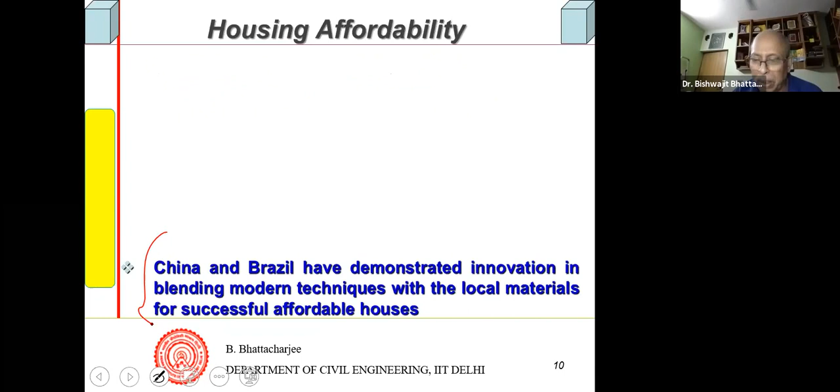So traditional materials and community involvement in community housing have been attempted. China and Brazil have demonstrated some innovation, blending modern techniques with local material for successful affordable houses. But that's limited, that's not very great, that cannot happen in a big way.

One successful effort reported is the Aranya Community Housing Project in Indore, since we are looking at the Indian scenario. There are many places where the state has tried to give houses right from 1970. They have never been successful because to the community it was not affordable, they'll sell it or rent it to buy nutrition. So that community we are not looking into, that cannot be the market.

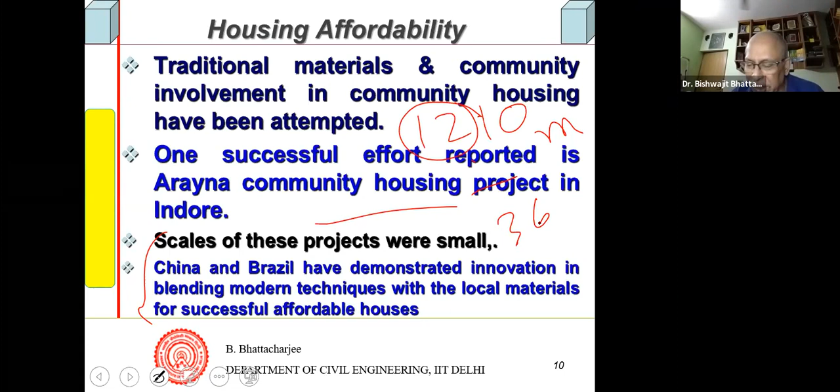Above that is the market, and there's an upper limit of the market too. But all these scales of projects are very small, they're not large scale projects. Remember, we just talked about 1.21 billion population. Think of 1%, that's about 12 million. 3% is 36 million. So percentage-wise, when you look at the absolute population, it is pretty high.

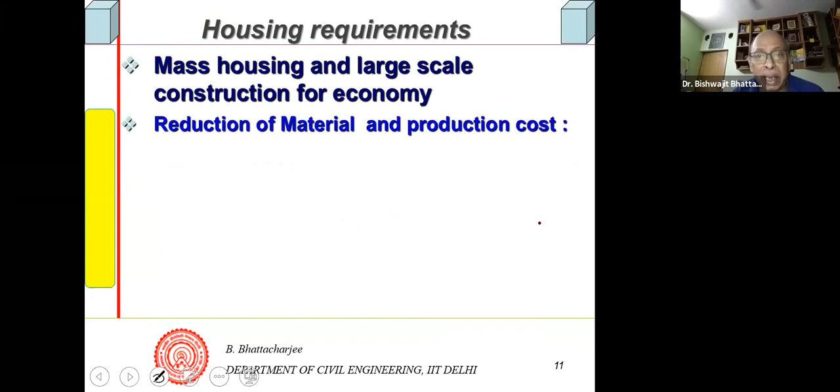So mass housing and large scale construction for economy, reduction in materials and production costs - this is the requirement. Optimal multifunctional design and industrial construction, and speed and construction quality. That's all.

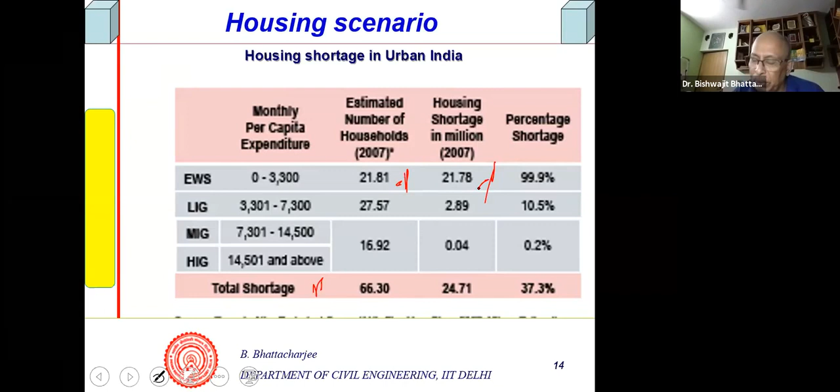Anyway, we thought we would look into this in a more systematic way, and that's why we did this literature review. So monthly per capita income expenditure, based on that EWS has been suggested, and total shortages has been shown in these ranges, for MIG and so on. So what is the shortage? Housing shortage in millions, estimated number of households existing in 2007, shortage also is this. So percentage shortage is 99% and so on.

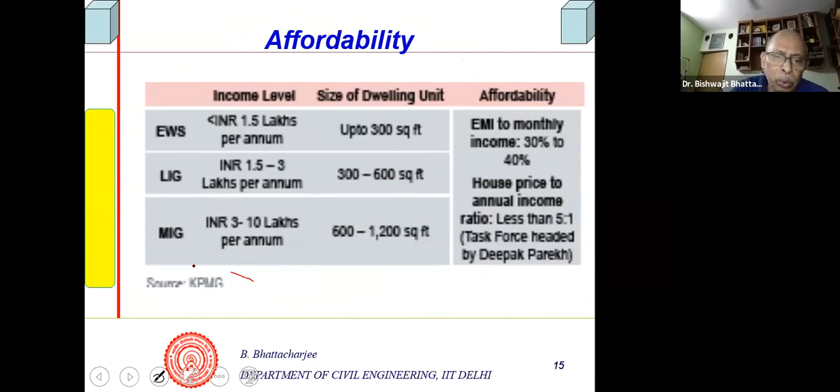Similarly, income level, size of dwelling unit - these are from Government of India, NBO, and some source from which one can get it. But I'm not really interested much in this. The minimum requirement is based on just hygienic condition, livable. You don't have to have great comfort, but you can design for thermal comfort and things like that. Sanitation and hygienic issues, that should be there.

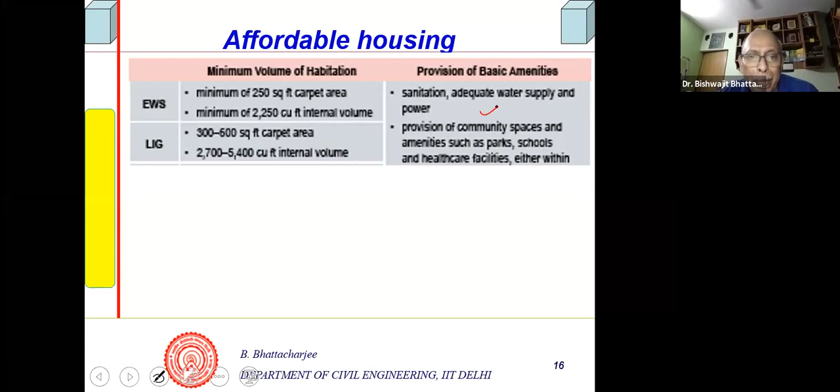And carpet areas for LIG, that, this is what it is. So in this zone, there are a lot of vacancies.

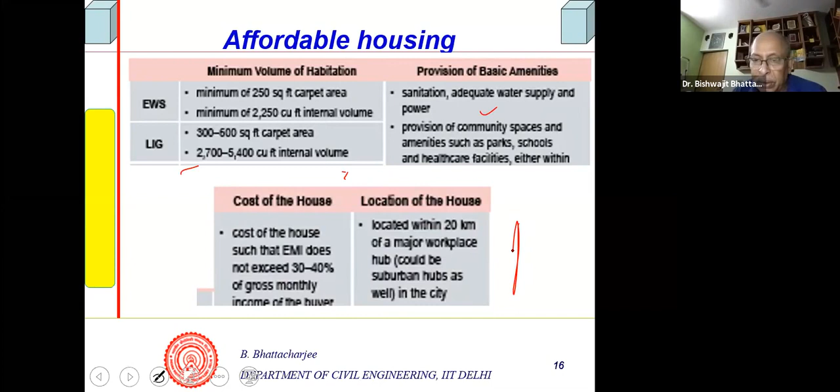Cost of house should be such that EMI does not exceed 30 to 40%, that's what I said earlier also. And it should be located within 20 kilometers of the major work place. So it goes into a little bit of city planning as well. But anyway, I'm not really looking into this, it's from a literature survey we did to look into.

So basically what we thought was that a realistic market survey from all this should account for expenditure capability. So affordable housing lies above this PLB of expenditure, or 2.23 times PLB, the poverty line basket.

The PLB values we could collect from NSSO, National Sample Survey Organization. I think it must be based on the Rangarajan or Tendulkar Committee's report. At that point of time, it was set at 973 for rural and 1,407 per capita per month respectively in urban areas.

So if it is 2.23 times this, that means 2,170 rupees per month per person and 3,138 rupees per month per person are the affordability limits for housing.

So ALH, if that is it, below that, nobody is going to buy a house, or they cannot afford it, simply. So that population you have to leave out. The market cannot do anything for that, unless their affordability or expenditure capability improves.

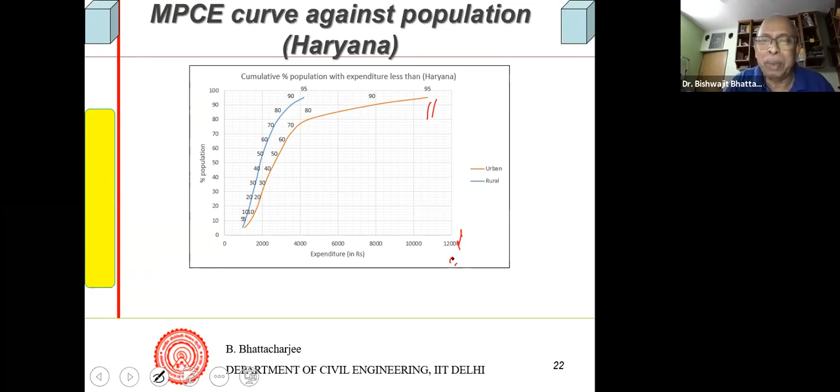They're all there - this is rural, something like this. I also picked this, nothing against any state, just to show you that I have similar graphs for every state. So I'm taking the range, the extremities - that's what we do in a scientific experiment. Bihar had 3,500, and this is how it is. Other states fall in between.

So these curves can be obtained from the census data, and then this is cumulative, 95% below. So if I want to find out the percentage of population at a specific MPC, these are called, all India again, percentage of population.

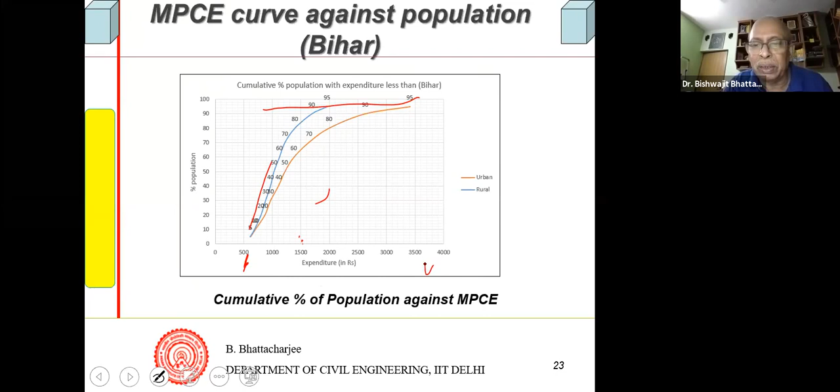And I have to take an algebraic term called log. Some of you might be familiar with this, because the value varies from 500 to 5,000, so the scale is too long. If I take log, then 5,000 becomes something, 1,000 becomes 3, and 10,000... log base 10 of 1,000 is 3, of 100 is 2. So they get scaled down. It's logarithmic, a bit of algebra, but anyway, you have to bear with me.

This is a little algebra involved, but not much - I'm not going to go into that. So at individual log values of MPC, you could get how much is the population percentage. But I'm not going to talk about this anymore. Even that was not enough for me to do the scientific exercise.

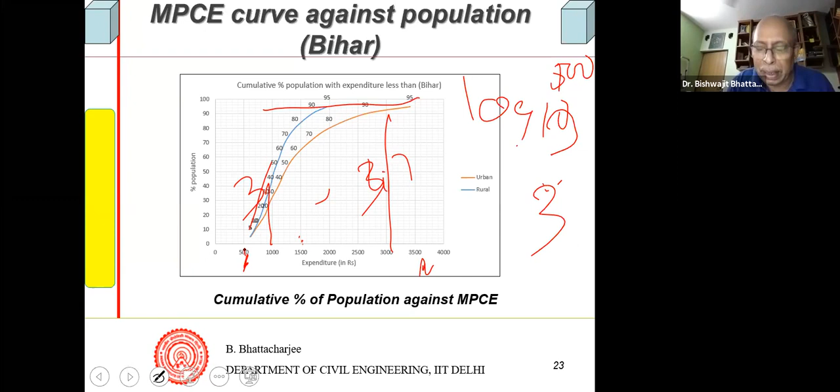This log MPC was too small. If you see this log MPC - log of 3,000 gives 3, log of 1,000 gives, sorry, this gives 3, this is 3.7 or something like that, 100 gives 2, 10,000 gives 4. So they are small numbers, I had to multiply by 10.

And that I call E - 10 multiplied by log of MPC. I devised my own scale, and you must have heard of this - some of you must have heard about noise, dB, decibel, which is also on a logarithmic scale. Many things evolve varying over a large range, and I don't think I'll go into the physics and maths of those. So I had to take it algebraically - many times we do log, right? Take log, and that's what it is.

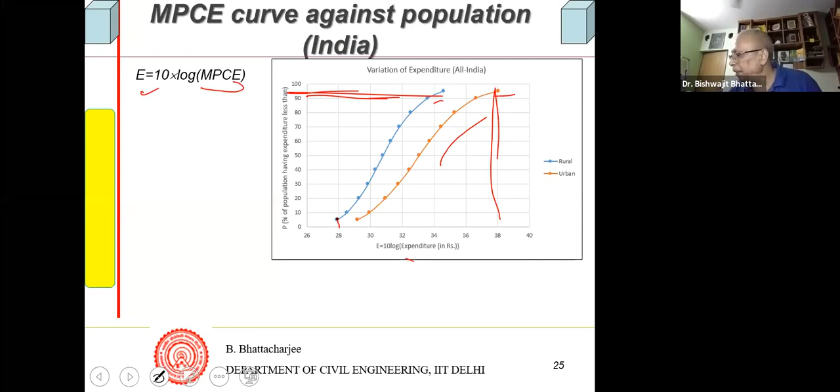So E, I am defining a new variable, which is related to MPC. When I plotted the population cumulative graph with respect to this, I get the urban like this and rural like this. The percentages remain the same, I have not changed this - only the values have become 38 instead of something like 7,000, and this has become 28 instead of something like 500-600. This is how I changed them to this variable, and I can fit a curve to these equations.

Those from arts background may not understand, but you must know from management science, if there's an independent variable, something else—for example, the number of webinars happening this month may be a function of COVID severity, or number of COVID cases. So we relate things. In physics, science, maths, including concrete science, we do this quite often. These relationships are available, and we could fit this into a relationship. I'm not going to tell you how to do it, not interested.

We used a software called CurveExpert that will give you this—Excel will do many things too, though maybe not a complicated curve. So you could fit a curve, P is this, fit curves to this. For each state we found out A, B, and then there's a term C—all this we found out, to the power C. These terms we found out for all the states.

So if somebody wants to do these calculations for any state, when we finally find the market, they might be interested. And then differential rate of change also we have found out. Anyway, considering the time, I'm not going further into this.

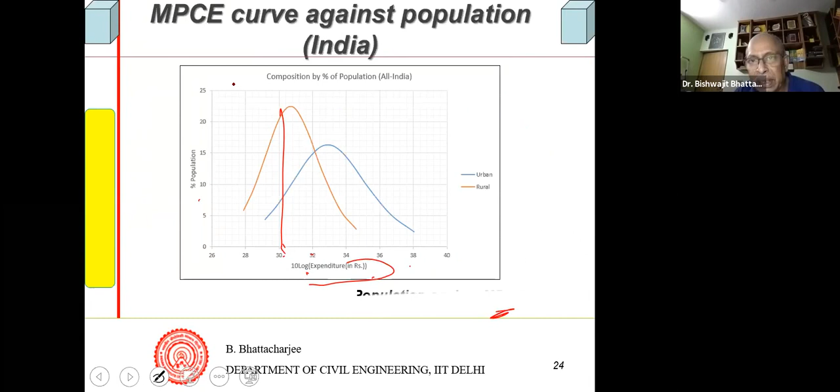Yeah, 2170 and 3138. If I take these values here, and take E, calculate according to this, then E comes out to be 33.4, and for urban it comes to 35.0. So this 33.4 is here, 35, and therefore you see...

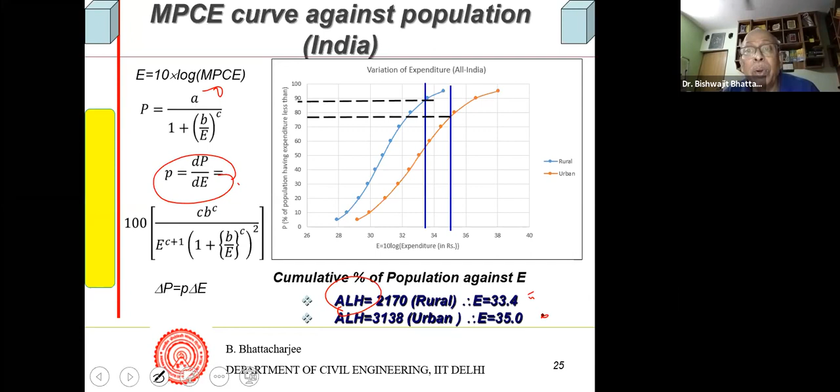89% of the population may not be able to afford a house in rural India. And by 2011 census statistics, 77% of the population of India may not be able to afford a house. But 23% itself is very big. So 33—that's what I'm saying—population works out to be 89 and 77.

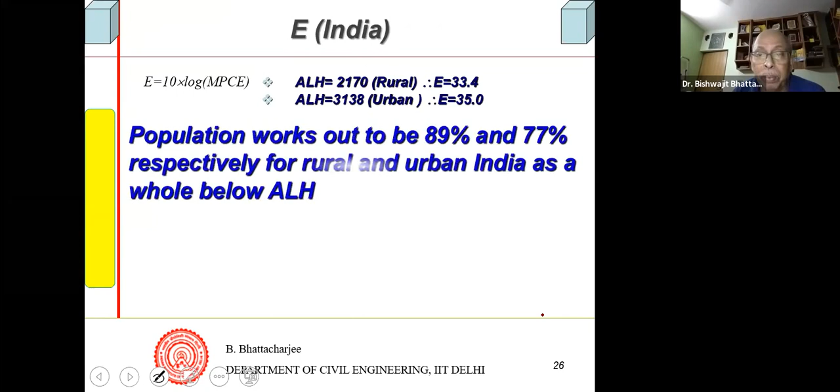And thus maximum available market for housing would be 11% and 23% of rural and urban population of India as a whole. Now 11% means 14 crores, so more than 14. And 23% also would mean double of it, 28 crores. That's pretty high.

There's a surplus supply over higher income population corresponding to monthly income per capita expenditure capability of 8,500 from that graph I showed. And if I take per capita income—this was per person per month—monthly annual family income is 5 lakhs 1,000. They're the people who might already be having a house. So this population is not our market.

So 99.8% of rural population have an income lower than that—most people have income lower than that. That means all my 11% is available as market. And 97.5% of urban population have an income below this. So 100 minus 97.5, I subtract that from 23—20.5% of the urban population is the market, total market in the country. State-wise, you can find out.

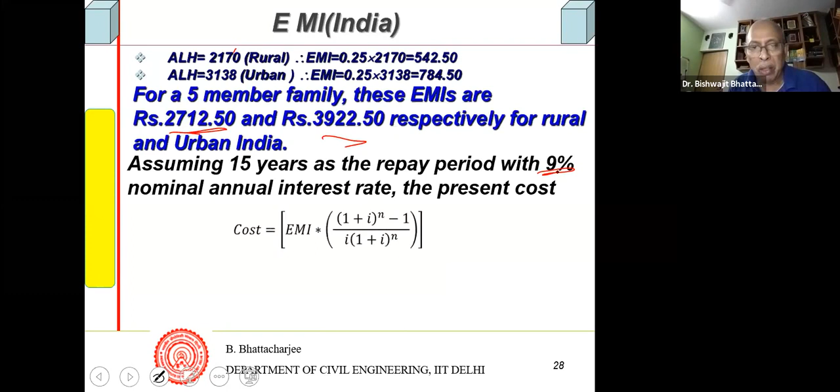Its present cost can be worked out. Land cost I have left out—I'm assuming the land cost, you have to add or adjust, whatever it is, it's a very variable thing. So I didn't take it. Taking 9% as interest rate, the monthly interest rate would come out to be this, and for 180 months, 2.67 lakhs is the house cost with minimum hygiene and minimum things.

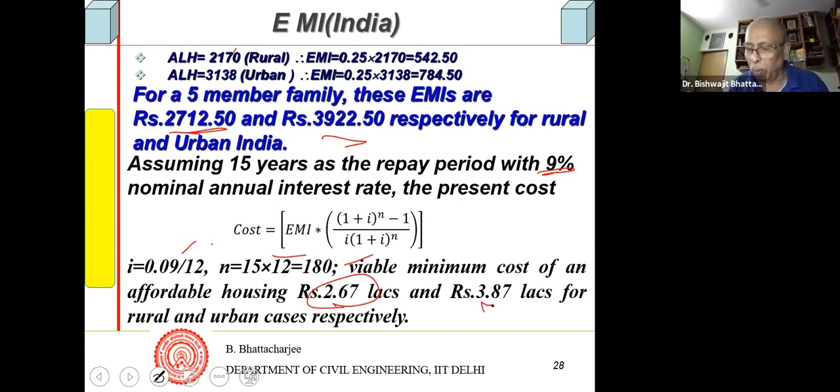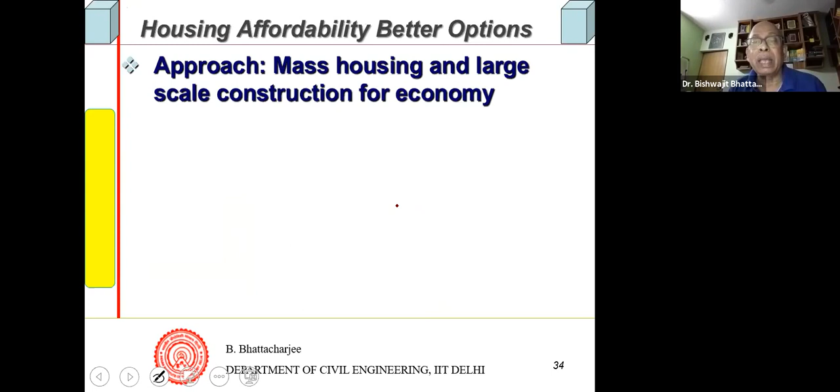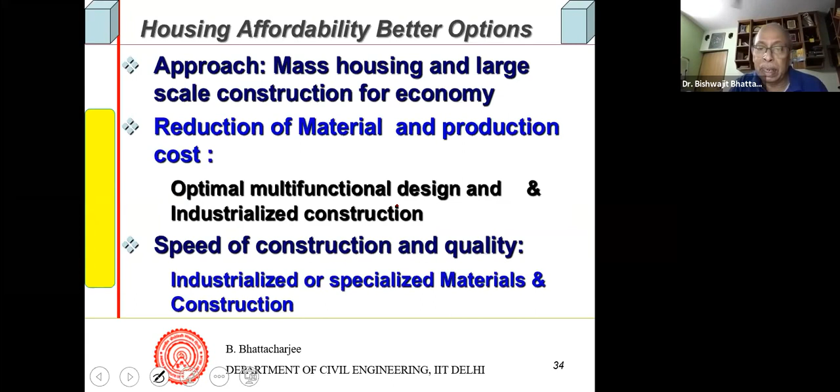But then, it has to be mass housing, large scale construction for economy, material and production cost, optimal multifunctional design and industrialized construction. If you want to give minimum thermal comfort, it has to be multifunctional. The structure itself should be able to do more than one function together, and obviously speed of construction and quality. So only industrialized and specialized material construction can do this job.

And I of course say concrete will be a major component, industrialized construction with concrete, because it's an extremely versatile material. If you look at the material side of it, this is a drawing, a sketch for the material side of it.

You can have a large number of binder options, right? This side, fiber reinforcement, that's for high-end concrete of course. But I'm not saying high-end material you will not be using, you might be using, I don't know what is the kind of ones to look into. So you can have OPC here as a binder, OPC then water, OPC and water that forms the binder. OPC, water, maybe silica fume, maybe geopolymer, maybe what do you call resin binder. There are all possibilities.

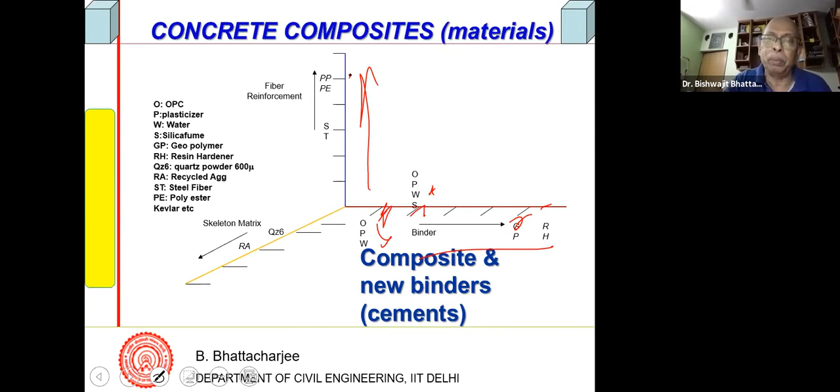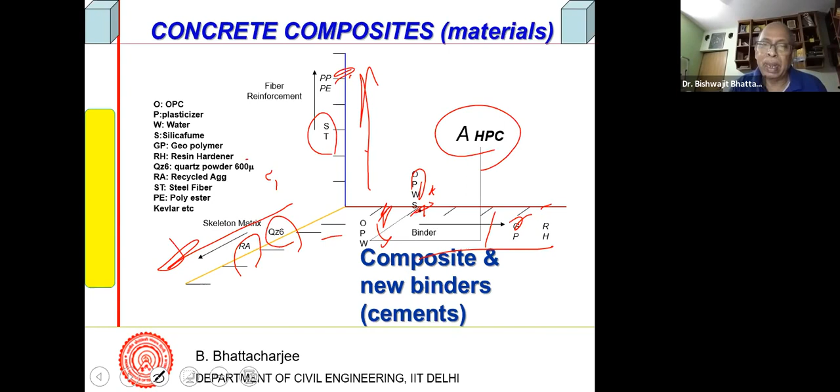It only shows possibilities. There are all kinds of fiber reinforcement possible, from steel fiber to polypropylene, they have their specific purpose. This stops bleeding, this gives you better fracture resistance and so on. There is all kind of skeleton or aggregate system could be there: recycled aggregate, manufactured aggregate, simply quartz that's used in high performance or reactive powder concrete. So you have actually quartz, 600 micron down, right? That's what you use together with OPC with silica fume binder and some sort of super plasticizer, hyper plasticizer, and steel fibers might give you this. So you can see that range.

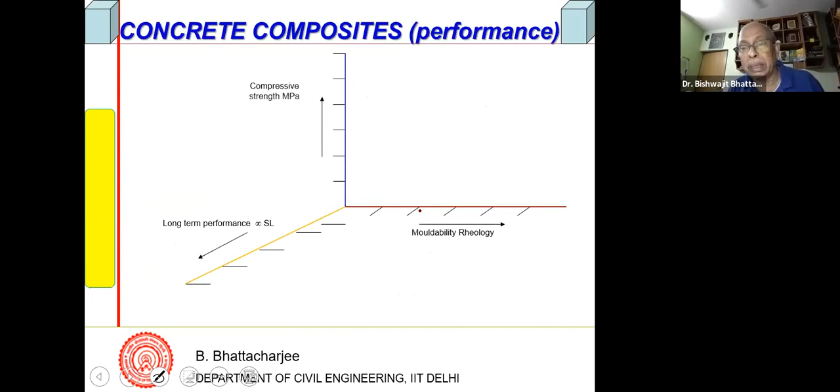You can design composite system, concrete composite system, and you can have its performance again in a 3-dimensional matrix. So x-axis shows its moldability, what you call rheology sometimes in scientific terms, and you have from zero slump to self-compacting concrete, mass concrete to 200 MPa reactive powder concrete. Versatile, very, very versatile, but then it has got problems with ductility, and you can make composite out of it.

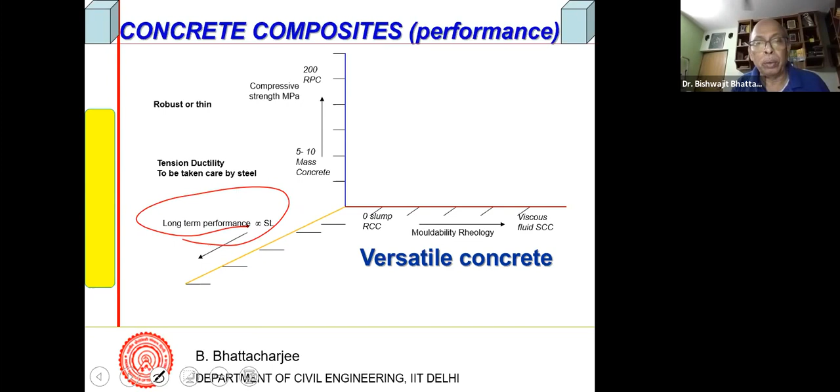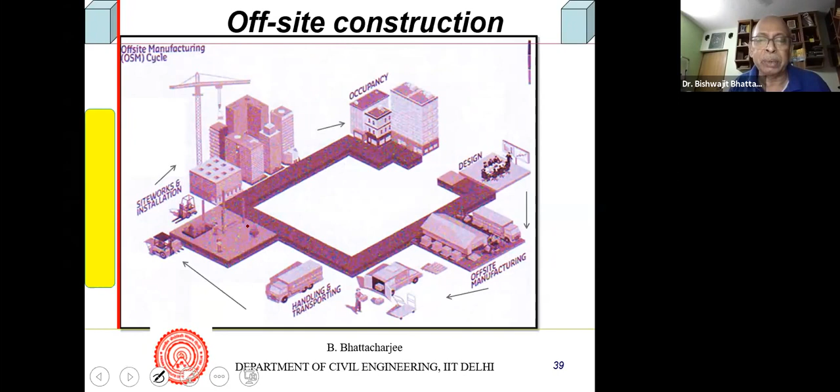This is offsite construction, which we know starts from the design. Everything is done in the manufacturing, done offsite. I'm not going to discuss this too much today. And then site works, installation, transportation, and all that. So that's offsite construction and offsite manufacturing cycles, something like that, construction design, everything drives the other one, right? And people, process, technology, all involved everywhere.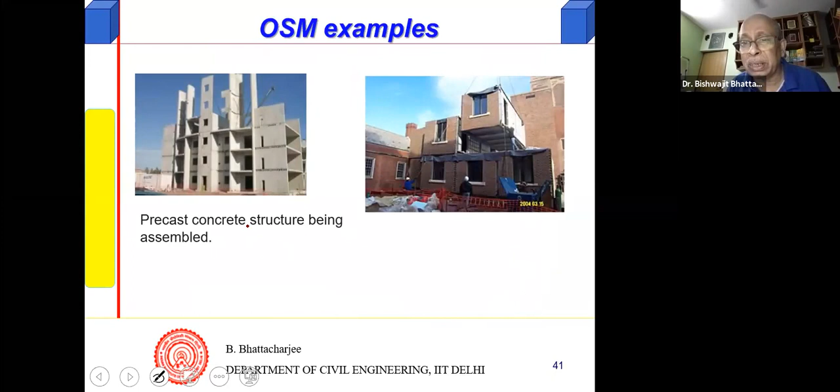Examples, plenty. Precast concrete structure being assembled. Some of this is being done in India. It's not that it's not done. 3D modular, steel modular, increasing construction efficiency through modular construction, as seen through examination of construction performance.

Obviously, capital cost is high. Labor skill, I'll talk about this quickly.

I do not know how much time do I have, given the extent and breadth of the topic. So I'll take about 15, maybe 10 to 15 minutes, not more than that. Is the time there for about 5 or 10 minutes or so? Yes, Mr. Praveen? Okay, I'll go ahead.

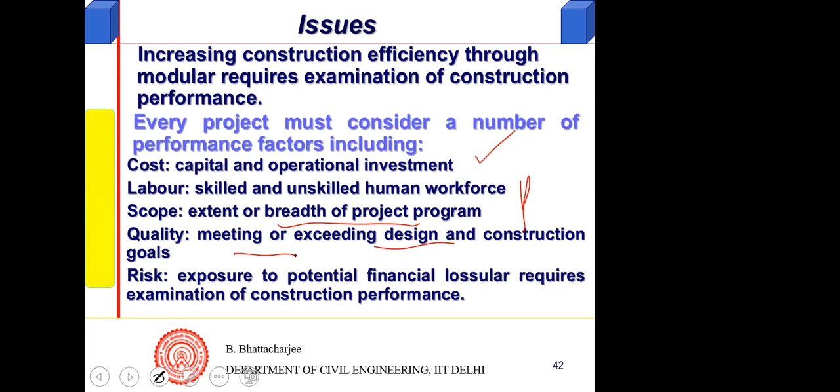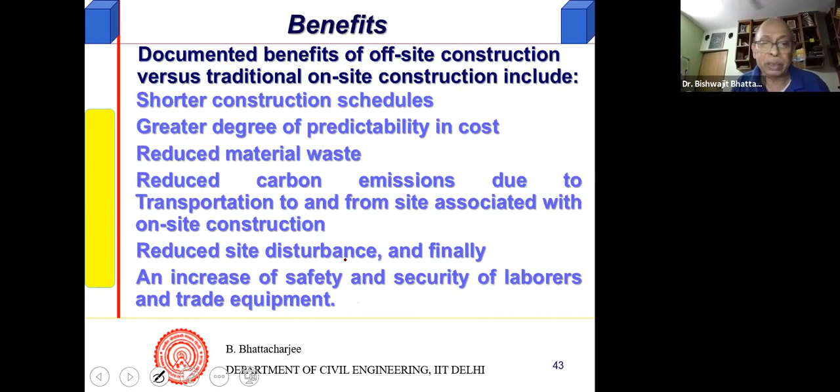So quality and all, you can control pretty well. Cost is reduced because individual cost will be reduced beyond a point, called the break-even point. There are plenty of benefits: shorter construction schedule, greater degree of predictability, and so much more. You will get plenty of literature on this, so I'm not going to talk about it.

So useful parameters are, of course, labor cost, material cost, and plant cost. There's something called the C factor, which is covered in one of my articles in CE&CR, in the precast chapter. So the C factor is the ratio of cost of skilled labor to cost of concrete delivered at site. And another is the P factor.

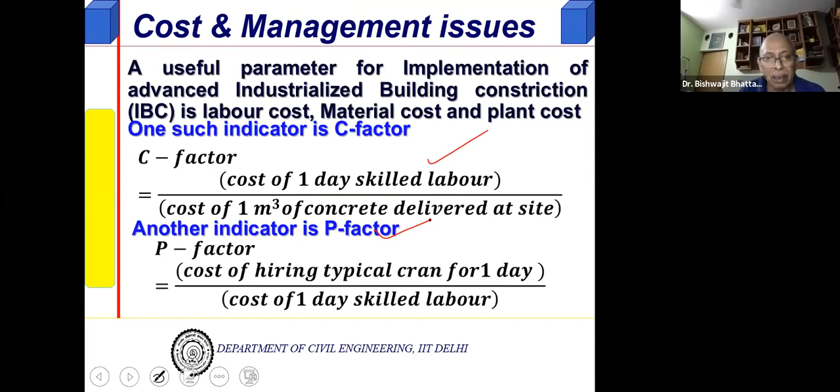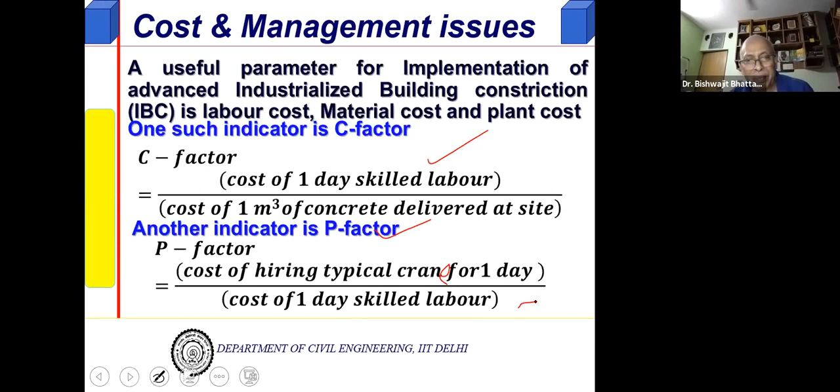P factor involves the cost of a crane. This has somehow become a picture, I'm not able to edit it. So it's the cost of hiring a typical crane for a day, and the cost of one day of skilled labor. The product of these two has been seen to be constant, around 10, for many countries when compared.

I'm talking about buildings, obviously bridges too. You can have site plan, for example. So precast may not be industrialized construction. Industrialized means you are selling it also.

There are three types of precast: one is on-site, temporary, like for a bridge. There's semi-permanent, like the casting yard of Delhi Metro, but that's not for buildings. And permanent, like Hindustan Prefab or many other companies now involved, particularly in Pune, or many other places, even Delhi, there are a number of them. But they have to be a factory to sell it, they have to see the market.

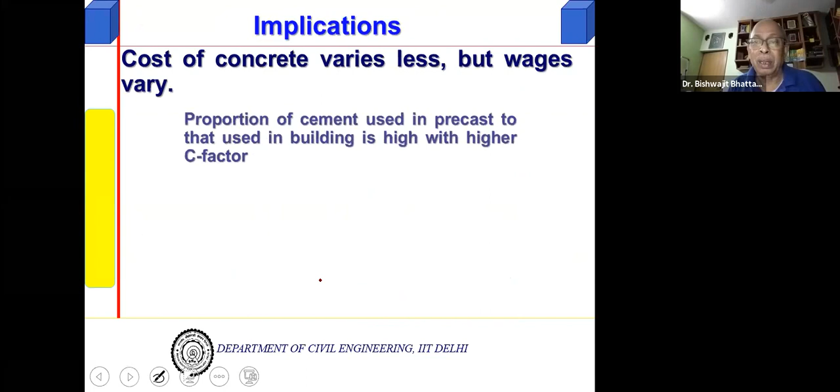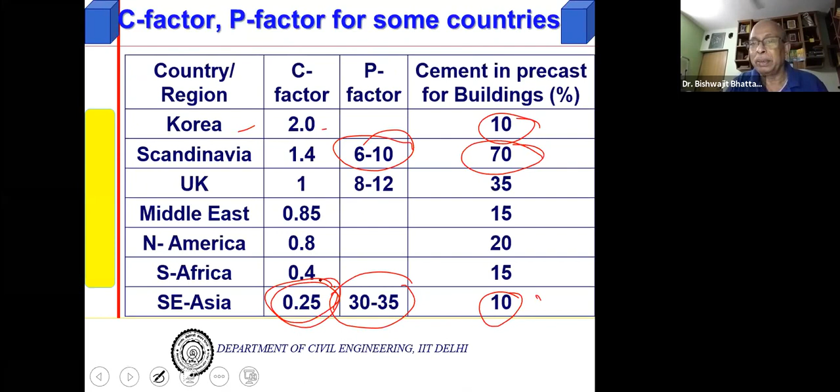Wages vary, but cost of concrete doesn't vary much. And the proportion of cement used in the precast industry is higher with a higher C factor — that's the proportion of cement in precast construction. This has been seen to be around 10.

And if we have to improve this, possibly, indirectly, perhaps somewhere the state or a consortium of people should train people, cut down on the unskilled people, and increase their skill.

So that they earn more, but earn using a machine. Well, these are just thoughts. The Builders Association are the better judges of this kind of thing, they know their economics, they can form a consortium or think about it more. I'm just inducing, triggering off, sparking off a thought in their mind that there's a market somewhere.

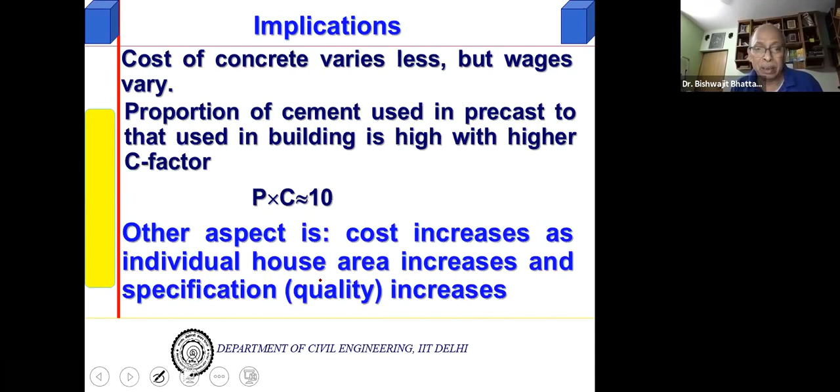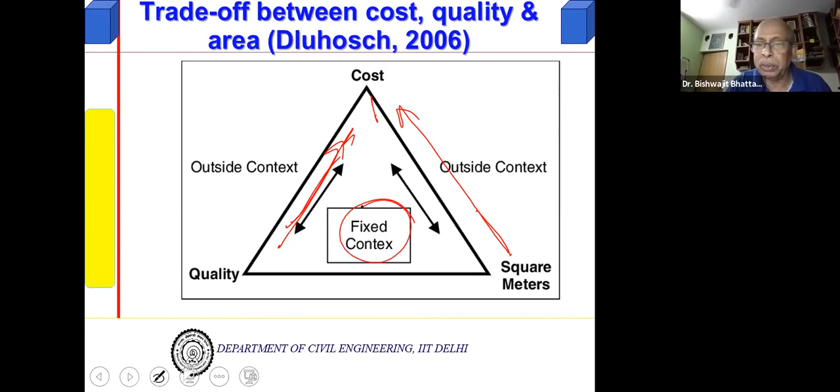Other thing is that cost increases as house area increases and quality increases. Quality may even be a specification someday. So you see the cost increases when square meter area per house increases. But then we are looking at affordable housing only, so it reduces when this reduces. When you improve specifications, quality also improves, but there's a minimum quality you have to maintain, and that also increases the cost. There are some fixed costs, and outside, there may be something more. Anyway, this is from their work.

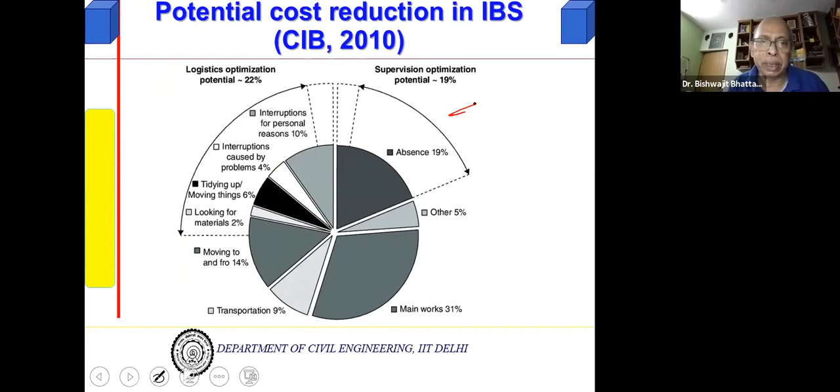Industrialized construction can cut down on supervision cost by 19%, and logistics cost by 22%. So the cost reduction is possible.

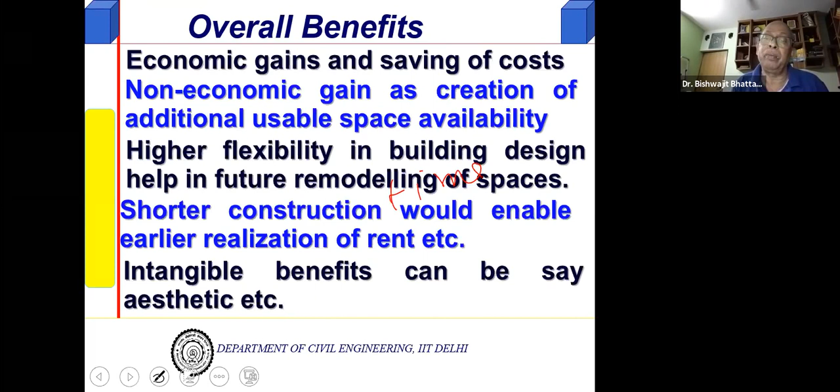Economic gains include saving of cost; non-economic gains include creation of additional usable space, etc. Shorter construction time will enable realization of rent. Higher flexibility in building design allows you to combine functional design with structural design, and aesthetics can also be handled.

Grading which type of alternative has what benefit might be subjective, and can be done by management tools like analytical hierarchy procedure. You can find out weightages, P, for a particular type of alternative.

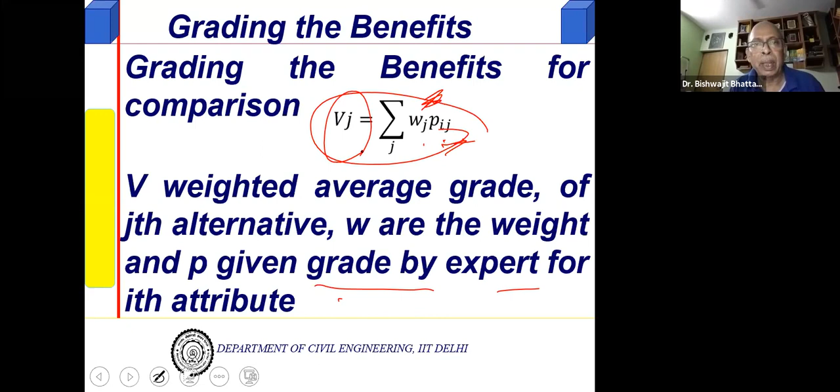W are the weights, and P is the grade given by an expert for an attribute for a particular IJ. IJ stands for a particular type of alternative technology, materials plus technology. So VJ, and you can compare and find out which is best. This is called analytical hierarchy procedure, used in managerial science.

So there are issues of benefits. Saving time is one of the important things. Also, there'll be no fouling - HVAC may not be there in affordable houses, but electrical services surely would be there.

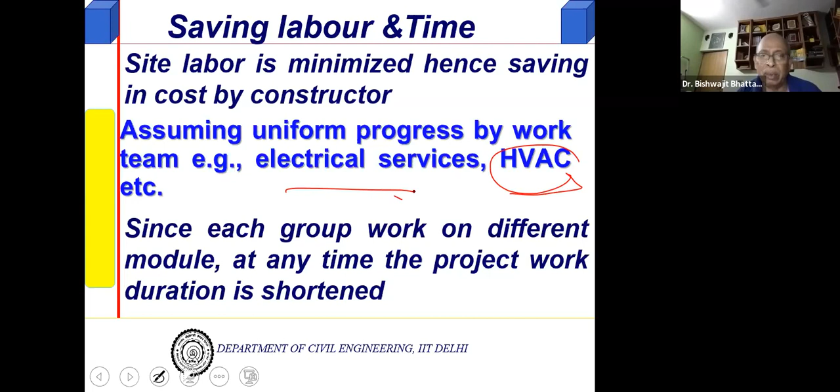Fouling means the two teams will not fight - they work in separate spaces when it is off-site construction, off-site manufacturing, precast system. So one can estimate site preparation time, initial time, number of work groups. If M is the number of work groups, N is the number of modules you are operating on, K is the maximum pace in days.

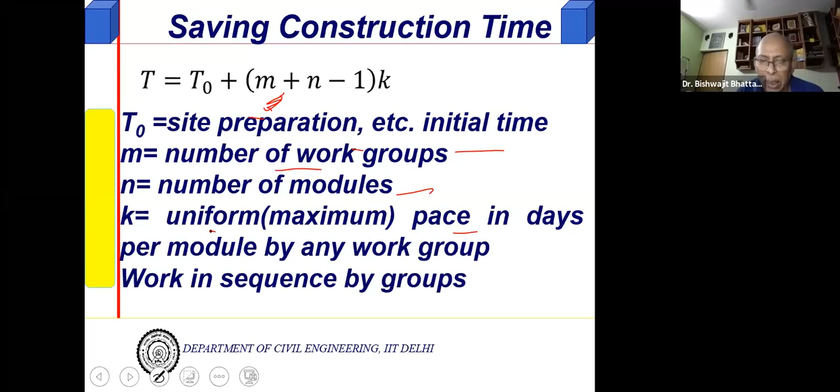That means this group 1 might require 7 days, group 2 might require 10 days, so you take the maximum. K is the pace, same in days per module - you take the maximum and work sequences by group.

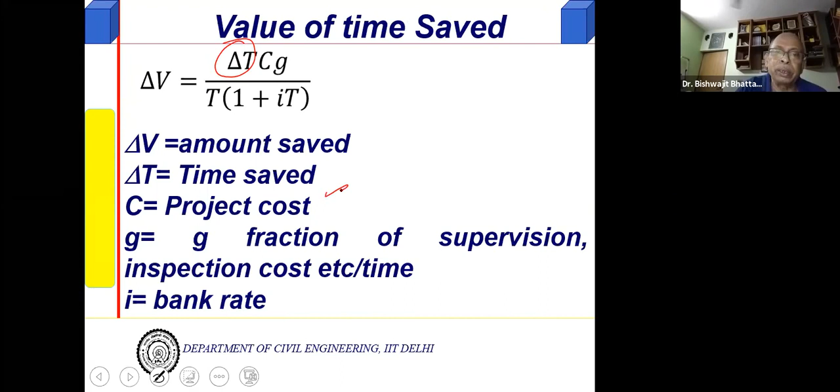So you can find out the amount saved related to delta T, time saved. C is the project cost. You can also bring in interest rate, etc.

Better quality means lower standard deviation, lower maintenance cost, longer service life, and you will save on cement consumption and therefore cost, because you reduce the standard deviation.

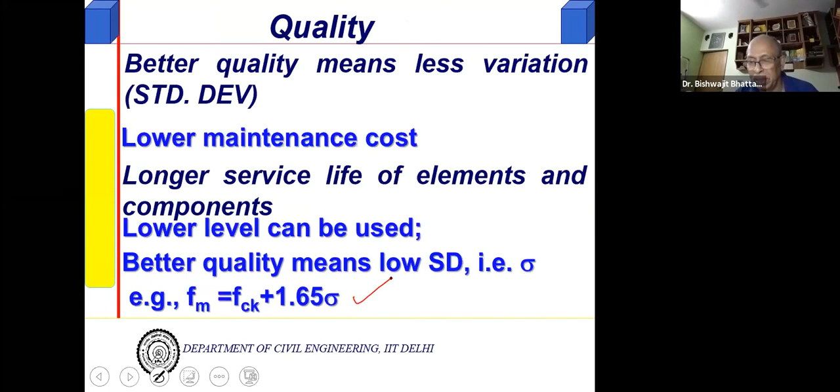So there is a break-even analysis required for optimal capacity. If you go beyond capacity, there's a problem.

This is the fixed cost, and the revenue increases in this manner as your product increases, and the cost increases. There's a fixed cost that increases, but cost per unit finally reduces when you produce a number of them. Similarly, benefit per unit, profit, can also increase if the price is fixed.

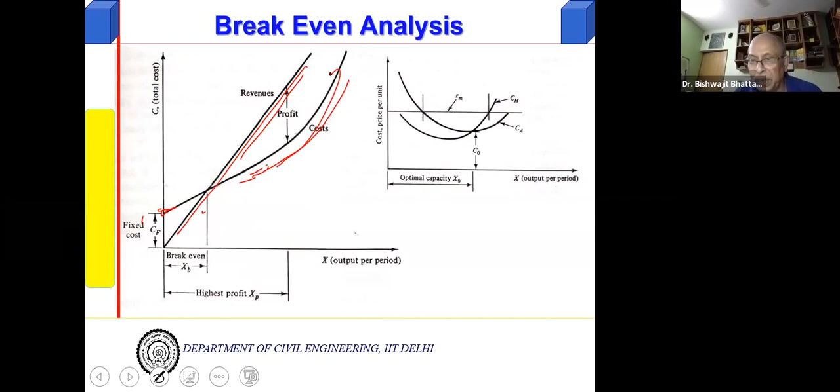Anyway, this is getting recorded, so you'll have the slides. Average unit production cost, etc., is given.

We did some global analysis - this is the last possible one on those. Finland uses maximum, Scandinavia as well. India is somewhere here.

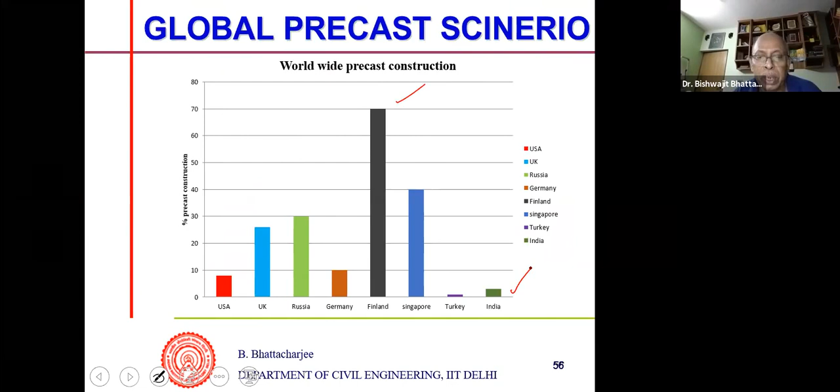We did some studies for economically weaker section housing and took the HUDCO and CBRI's building plan. I'll quickly go through this since I think I have nearly an hour and would have finished - I won't go into details. Total area is 628 square meters.

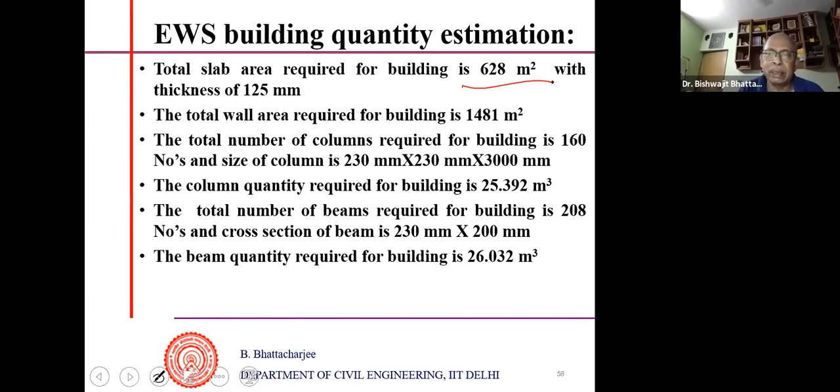Thickness is there - we thought hollow core slabs could be used. The size of the bed we took is this; this is typically the one that I think Elematic supplies. Perhaps there are one or two plants around Delhi, close to the Rajasthan border, and one in Noida. My students collected data from those places, and some might have been from L&T.

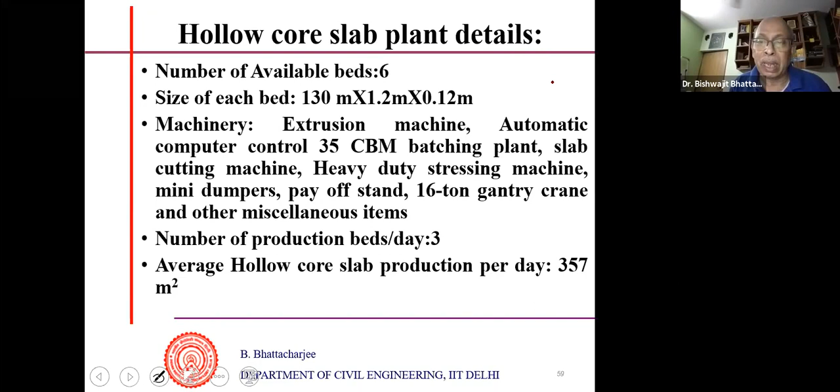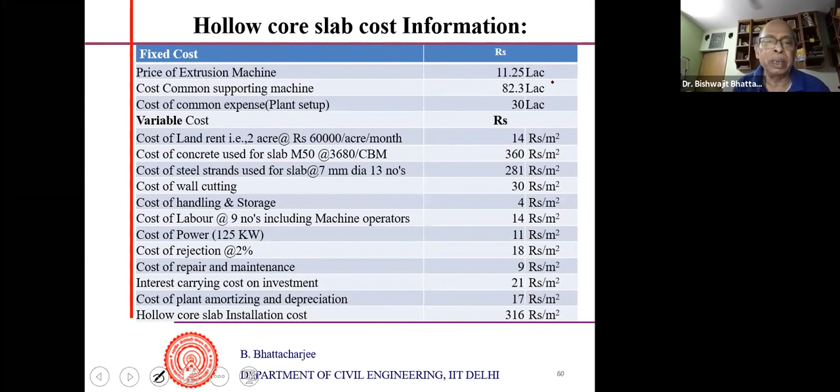So all these are there. Based on all this, the cost is calculated - price of the extrusion machine, cost, etc. Variable cost including land rent and everything is calculated, and then we calculated the cost of cast-in-situ RCC slab.

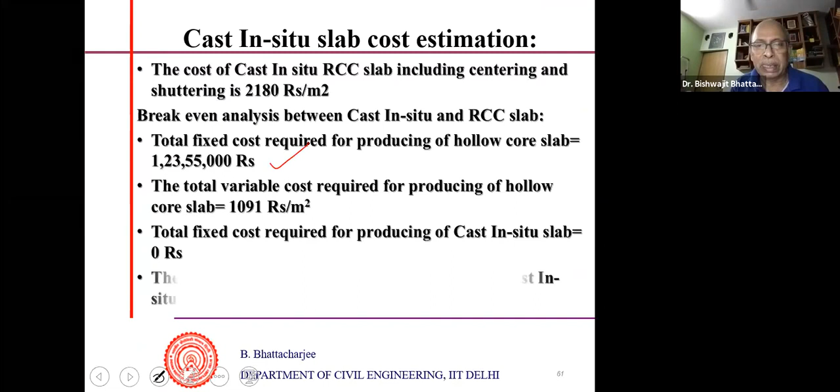We looked into the total fixed cost required for hollow core slab, and tried to find out only the slab part in this break-even analysis, then separately for the column. So we found the precast slab cost initially - as production per square meter increases, the cost beyond this break-even point actually becomes lower.

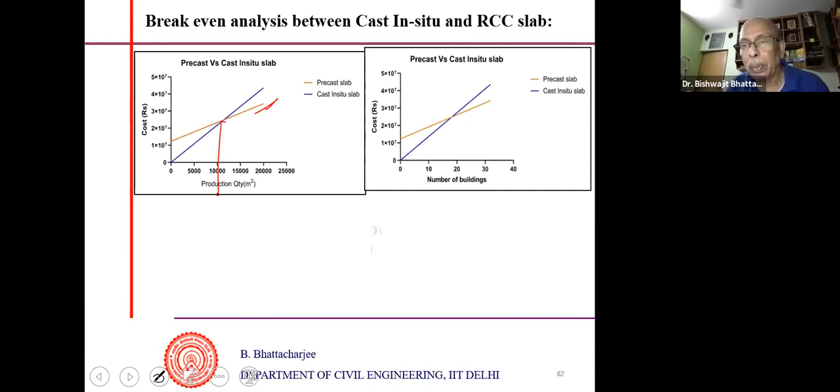We calculated this - some of you might be familiar with break-even numbers or break-even analysis. We found that through this, 11,418 square meters, or 18 number of EWS buildings, 4-storied or something like that.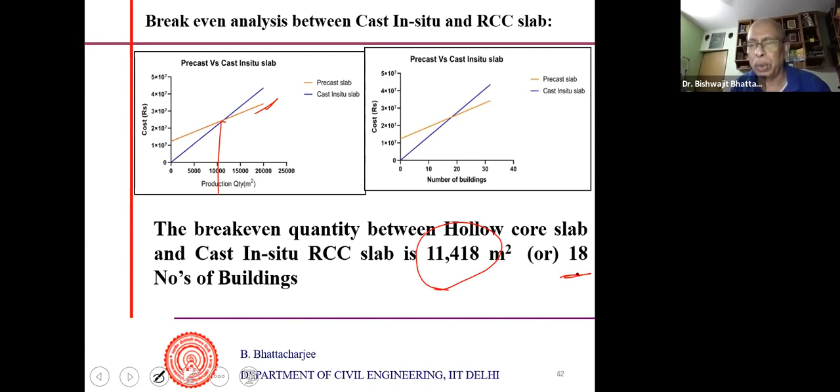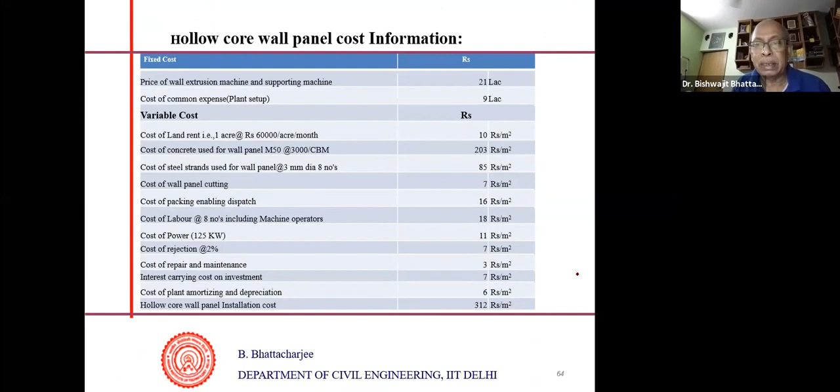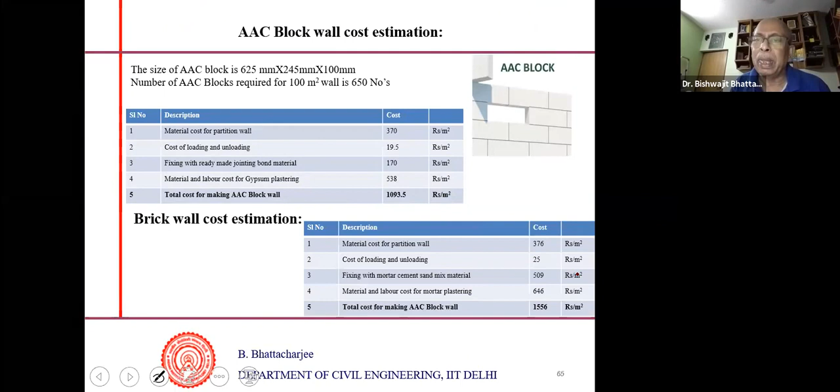Then for wall, we did the same analysis and found out materials cost of partition wall, etc. And AAC block, autoclaved aerated concrete block, we found out. This break-even analysis we did vis-a-vis brick wall, and this is what it shows. Precast wall gives this, AAC block is here, and brick wall. So beyond this point you can find out the break-even numbers. AAC is thermal insulation anyway.

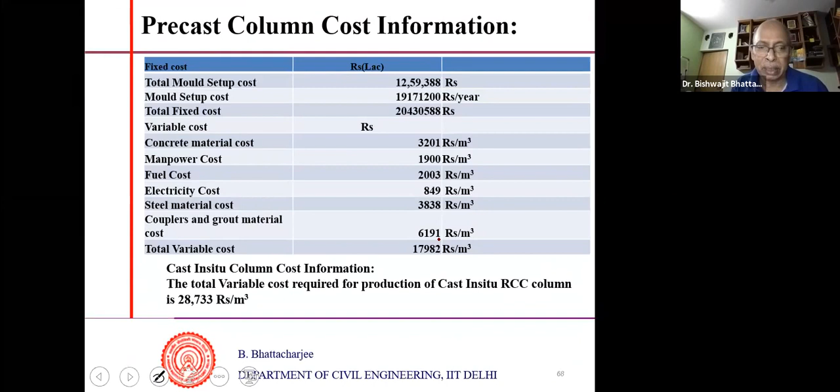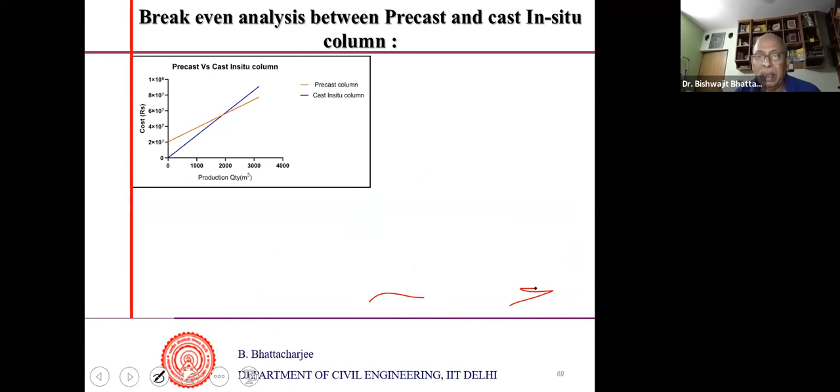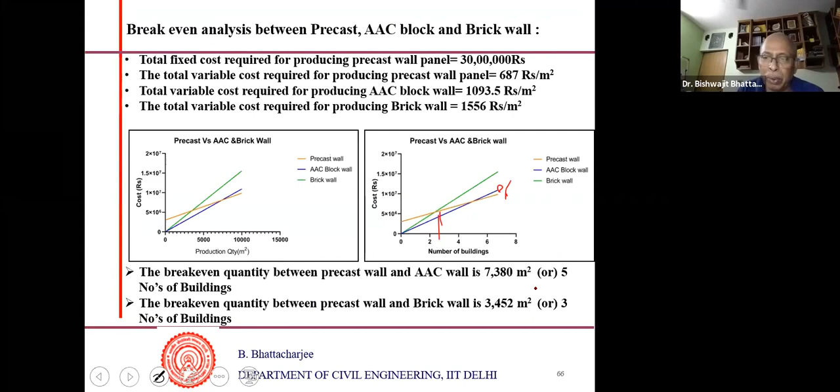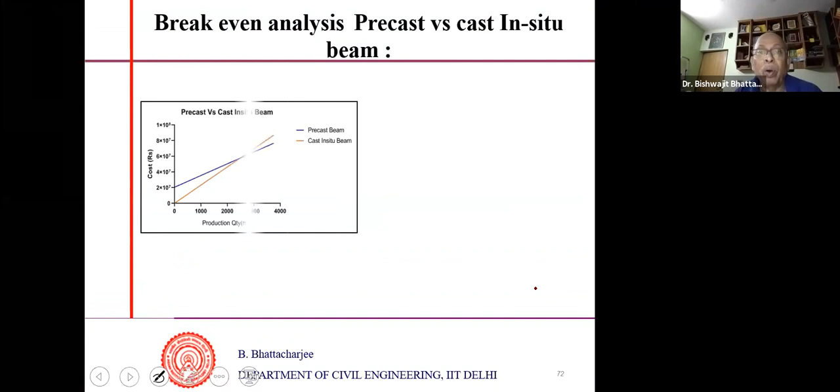So slab, wall, columns, and all of them we looked into, and then we found out what is the break-even cost for each type. So I think here I stop. Any questions? Of course, I'll answer.

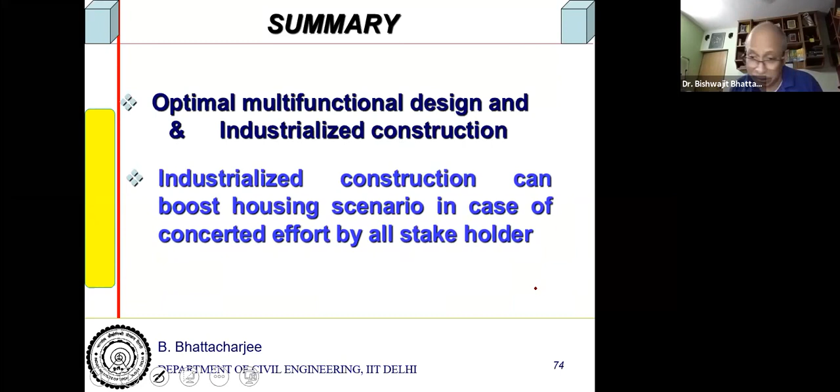What we have seen is that there's a market available, but not at the highest level. Possibly you can go slightly above the lowest level, middle level, there are available. But there are issues, state-wise it would be available. And possibly, I don't know what is the logistic, how one goes about it. But there are a lot of possibility of people having the affording capacity if you bring down the cost, and this can be done by industrialized construction. Not only that, it can do optimal multifunctional design, you give both. So therefore it can really boost the housing scenario in case of concerted effort by all stakeholders. Thank you very much.

Thank you, Dr. Saab, that was a very, very interesting perspective. I thought that we were going to be here for a civil engineering presentation, and of course we got quite a bit of that. But there was a lot of focus on macroeconomic factors and why it's important, analyzing the current situation in India with respect to population, resources, affordability, things like that. So it was wonderfully introduced, and then you got into industrialized construction and the importance of that for a country like India.